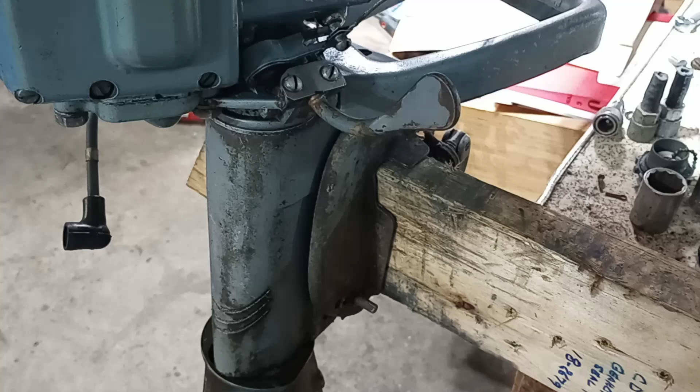Okay, everything's all back together. 1953 Sea King 5. They're all pretty much the same from '49 to whenever they quit making this style.

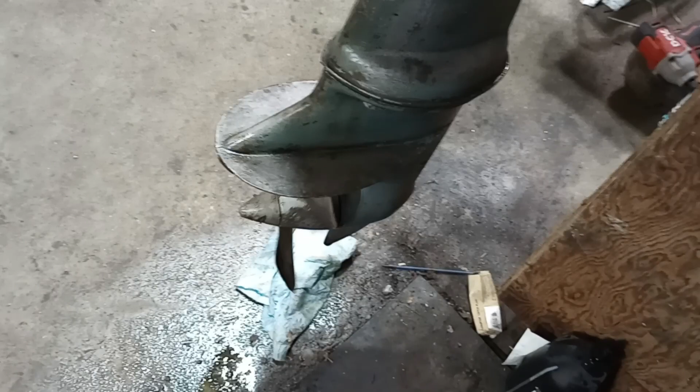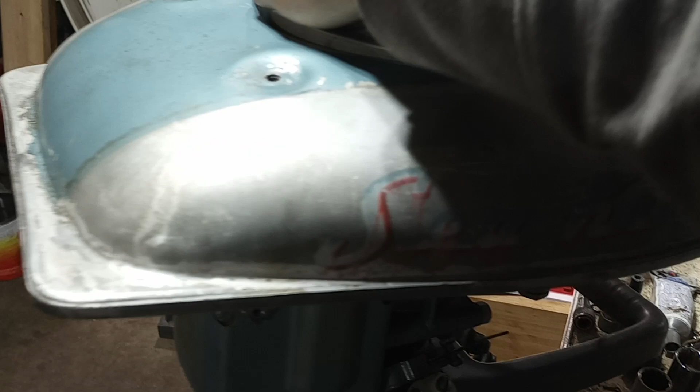When this lever is moved, it's going to want to have a positive snap where it finishes off by itself. That's how you know you got it right. That's in forward. And when you pull it back up, it might spin for a second, but then it'll quit. There it goes, I'm turning it by hand. See how it went all by itself?

That's kind of my gauge to know when the tension is right on the cable.

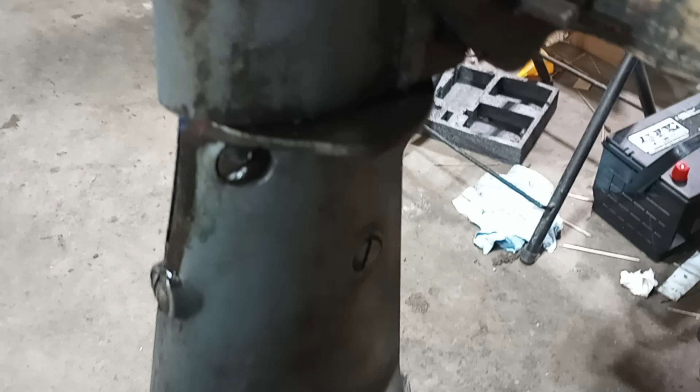We'll take it back out of gear. This only has forward and neutral, but it's pretty cool - you spin the motor all the way around if you want to go backwards. And it has a reverse lock mechanism to keep it from flipping up down here. It's automatic, spring loaded. Okay, I got it in neutral again.

It's in forward. Okay, so the problem on this was the clutch lever. It goes in through here. There's a little bow washer, it's called in the parts book, number 28.

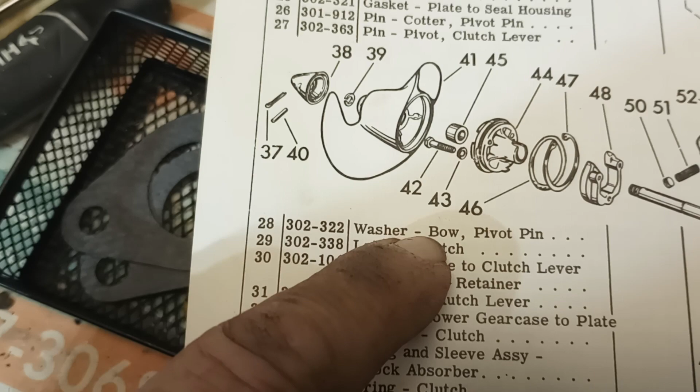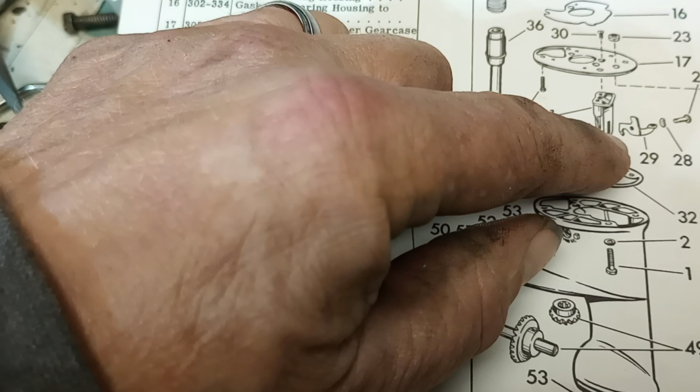Bow washer for the pivot pin. It's important what side of that you put it on. I can't really show you in the book, but the thing is, you want that lever to be as close to this spring as possible. So when you're looking at it on the motor, you would put that bow washer on the left side and then put the pivot pin - whatever makes that go closer, as close as possible to the spring.

Now, it was on the wrong side, which was about 1/8 of an inch. That's all it took, and it would not go into neutral.

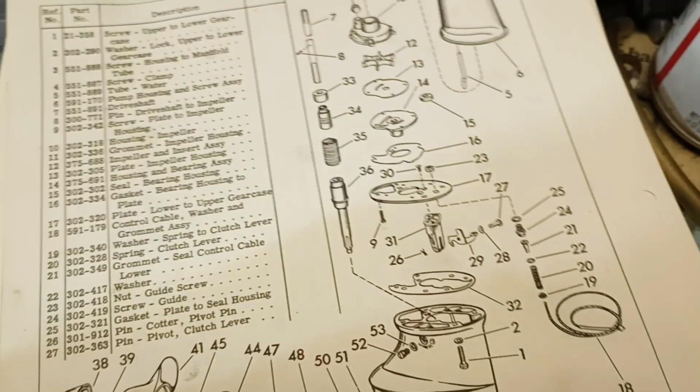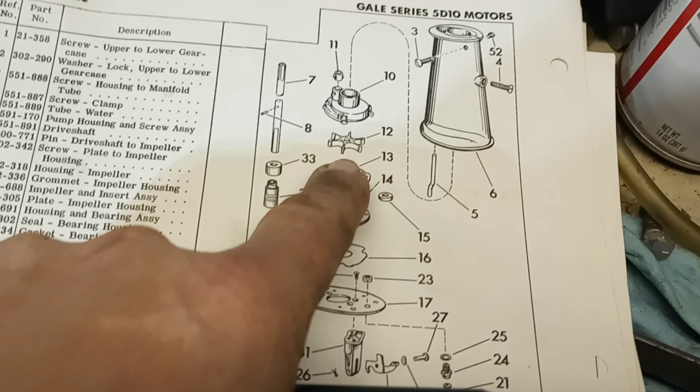Now, I looked up this impeller, number 12, 375688. I looked it up earlier, and it wasn't popping up on marineengine.com, so I used a Sierra 18-3001, and it's a teeny bit snug going onto the drive shaft, but that's the one we got to use now.

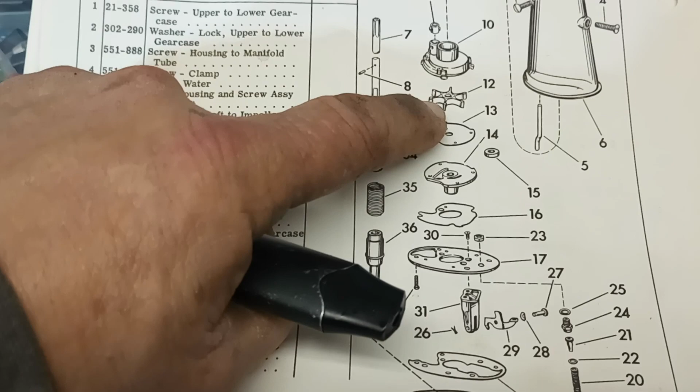I was reading, somebody else had said the only difference is the inside diameter on the hub of the impeller was a little bit tight. But I managed to get it on by cleaning all the carbon off of the drive shaft. I didn't have to do anything to it.

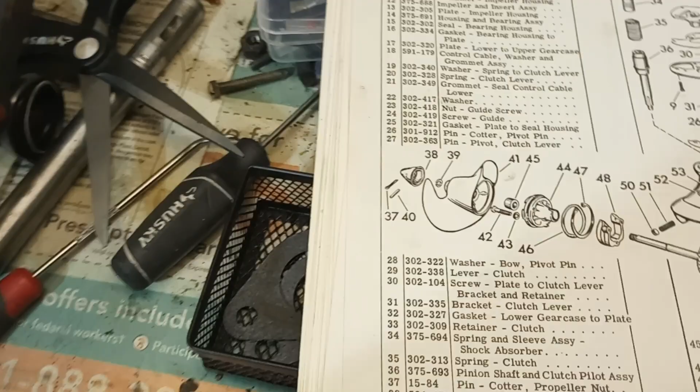But the shock absorber spring would sit down over this, and there's a little edge on that spring. I have another one here, I can show you. Set it someplace to get it out of my way.

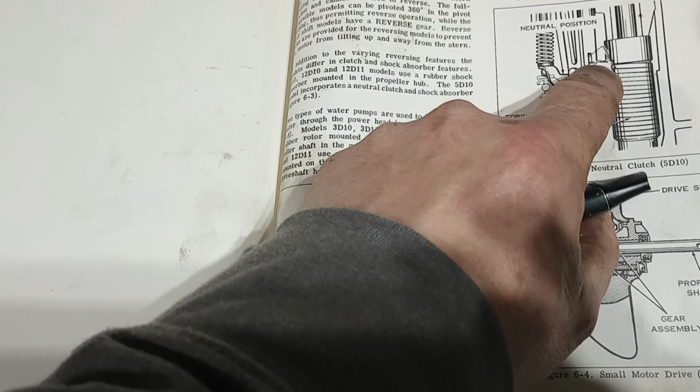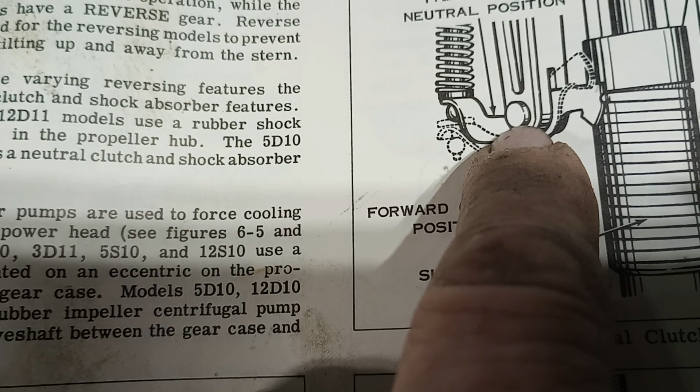Well, anyway, if you ever tear into one of these, you'll see there's a hook on the end of the shock absorber spring, and you need to put that wave washer, bow washer, to force this to one side, because the slot in that neutral mechanism is about twice as wide as the lever. So put the bow washer on the side that forces it to there.

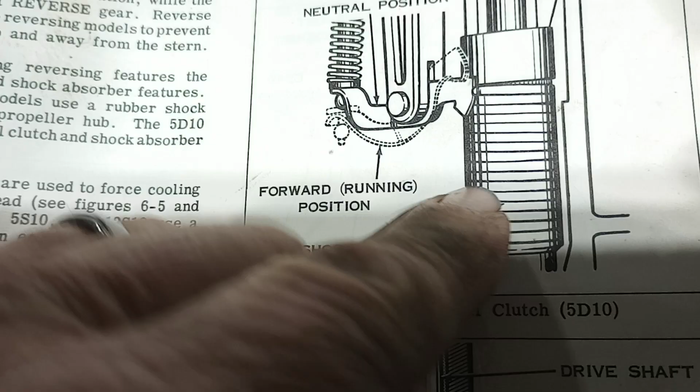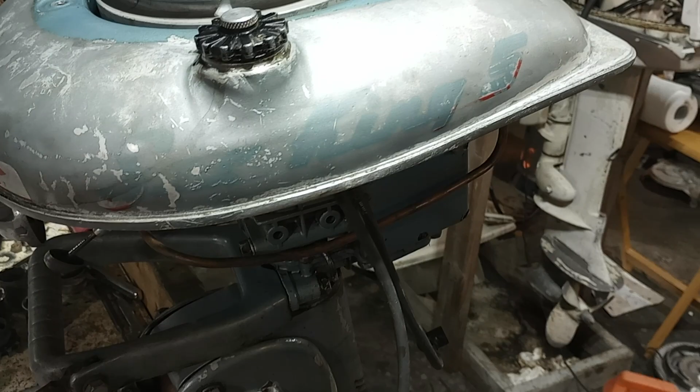All right, now all I'm waiting for now is a new float. I'm going to use a Mercury float from marineengine.com. You just have to pop the spring out of it, and drill it out 3/32, and then install it on the needle.

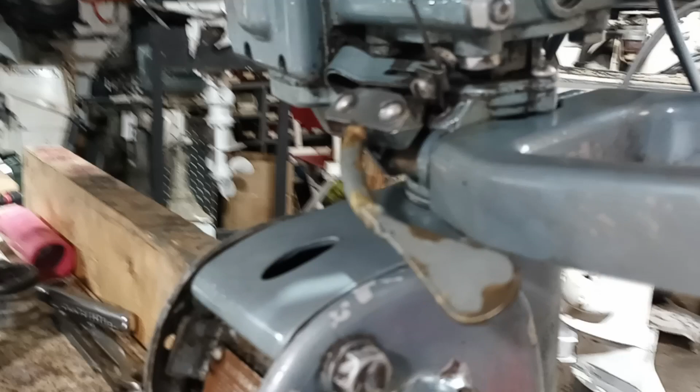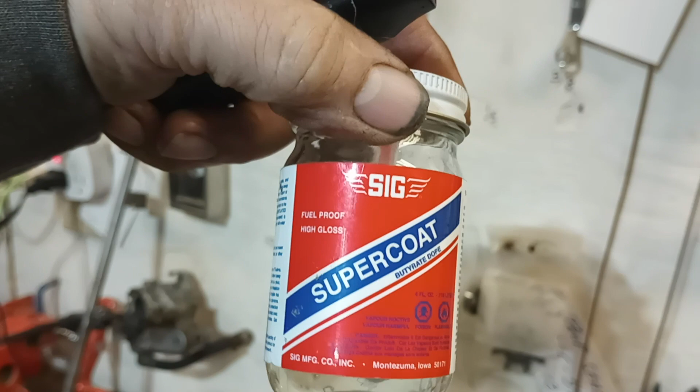I made one, and I probably didn't wait long enough. I put the - it's called dope, butyrate, butyrate dope. I put that on and didn't wait long enough. It's fuel proof, but it has to be completely cured. I didn't wait long enough, so I ruined it. I should have waited 24 hours before I put the gas to it.

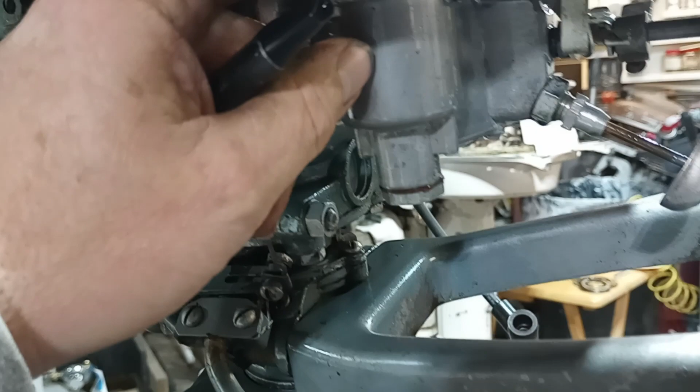So it floats up, but it's sticking. I think what happened is the cork swelled up because it got saturated with gas, because I didn't let the dope cure up good enough. So it's flooding out. But other than that, you'll know you got the tension on the cable here correct when this lever will flop off by itself once you get it started.